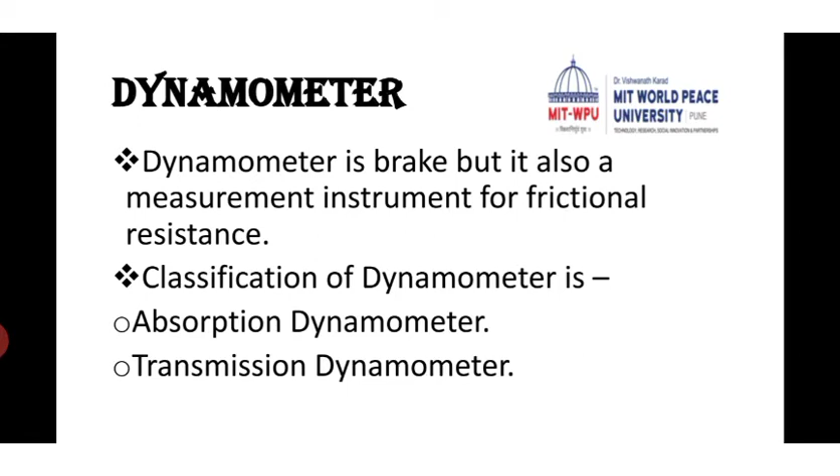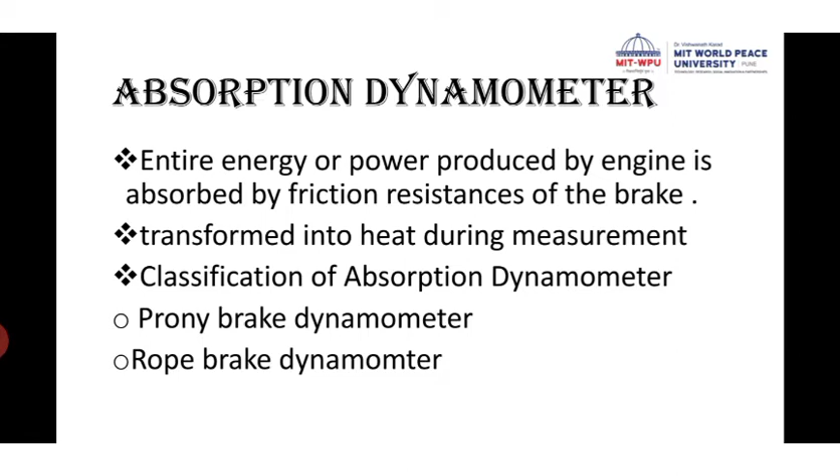In the absorption type of dynamometer, the entire energy or power produced by the engine is absorbed by the frictional resistance of the brake. The classification of absorption type dynamometer includes the Prony brake dynamometer and the rope brake dynamometer.

A helical spring is provided between the nut and the upper block for pressure control. The upper block has a long lever attached to it, carrying weight at the outer end. A counterweight is placed at the other end of the lever to balance the brake when unloaded. Two stops are provided to limit the motion of the lever.

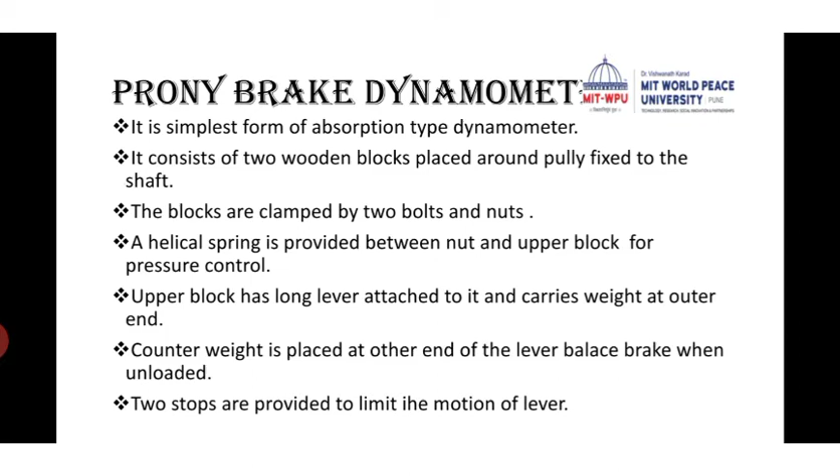The working of the Prony brake dynamometer: when the brake is to be put into operation, the long end of the lever is loaded with weight and the nuts are tightened until the shaft runs at a constant speed. The lever is in the horizontal position. The moment due to weight must balance the moment of frictional resistance between the blocks and the pulley.

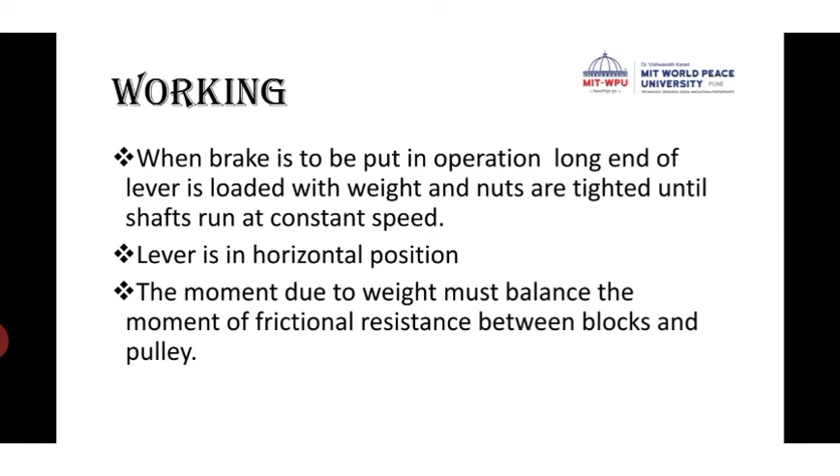For the calculation, W is the weight at the outer end of the lever, and L is the horizontal distance of the weight from the center of the pulley. Then frictional resistance, R is the radius of the pulley, and N is the speed of the shaft. The torque equation of the shaft is the weight at the outer end of the lever into the horizontal distance of the weight from the center of the pulley.

The work done in one revolution equals torque into angle turned in radians, which is T into 2 pi. So the work done in one minute equals T into 2 pi into N. The formula for brake power is work done per minute divided by 60. So the final formula for brake power is W into L into 2 into pi into N upon 60. The unit of brake power is watts.

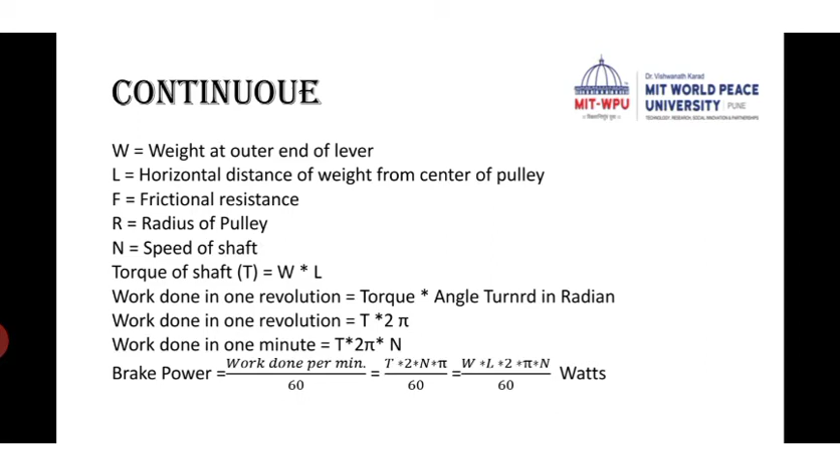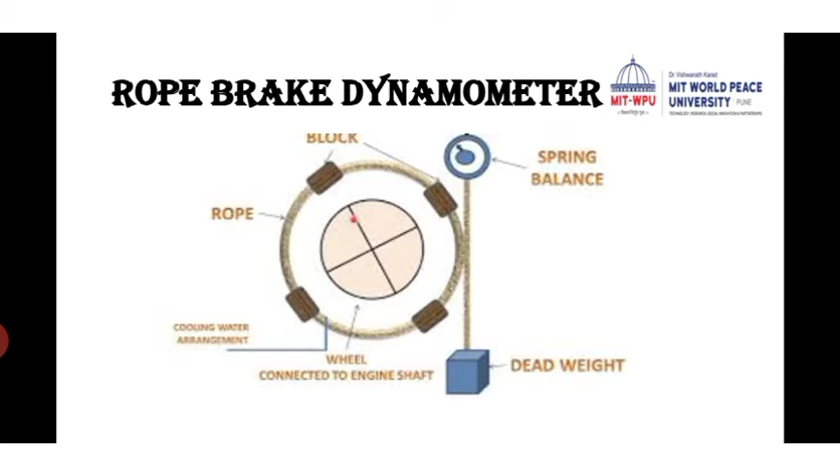The second type of absorption type dynamometer is the rope brake dynamometer, most commonly used for measuring the brake power of an engine. This is its constructional diagram. It consists of one, two, or more ropes wound around the flywheel or rim of the pulley fixed to the shaft of the engine.

The upper end of the rope is attached to the spring balance, and the lower end is kept in position by applying dead weight. To prevent slipping of the rope over the flywheel, wooden blocks are placed at intervals around the circumference of the flywheel.

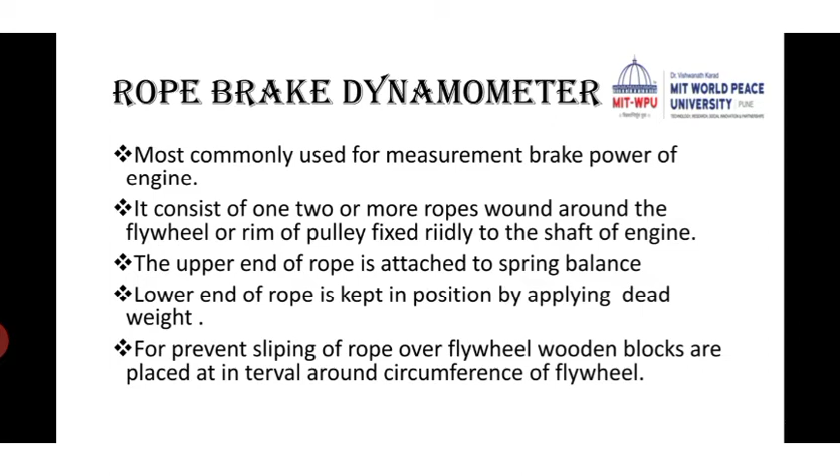For the rope brake dynamometer calculation, the net load on the brake equals the dead load minus the spring balance reading. The distance moved in one revolution equals pi into capital D plus small d, where capital D is the diameter of the wheel and small d is the diameter of the rope.

The work done per revolution equals the net load on the brake into pi into the bracket capital D plus small d. The work done per minute equals the net load on the brake into the distance moved in one revolution into N.

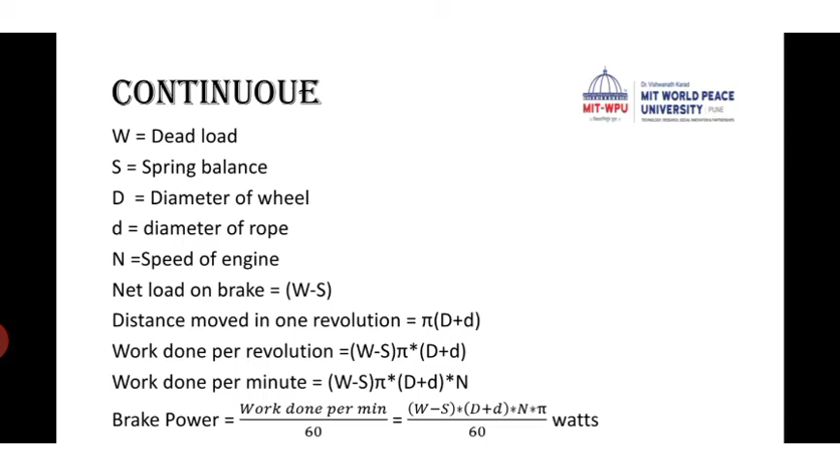The formula for brake power is work done per minute divided by 60. So the final formula is W minus S into capital D plus small d into N into pi upon 60, and the unit of brake power is watts.

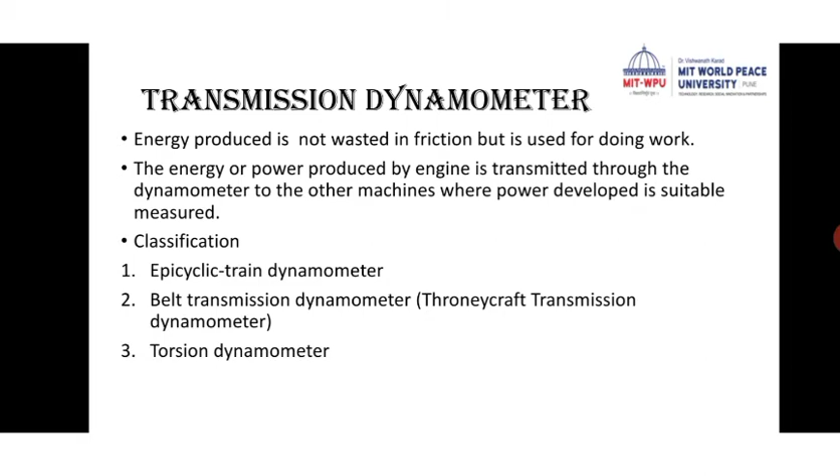Unlike absorption dynamometer, in transmission dynamometer, the energy produced is not wasted in friction but transmitted to do useful work. Energy or power produced by the engine is transmitted through the dynamometer to other machines where the power developed is suitably measured. There are three types of transmission dynamometer: epicyclic train dynamometer, belt transmission dynamometer, and torsion dynamometer.

First is epicyclic train dynamometer. We can see in the figure the constructional details of epicyclic train dynamometer, where it consists of driven annular gear, intermediate gear, wheel gear, and a lever where counterweight and weight W is attached to it, and two stops are there for controlling the speed.

In epicyclic train dynamometer, spur gear is keyed to the engine shaft and rotates in the anticlockwise direction. Annular gear is also keyed to the driving shaft and rotates in clockwise direction. A weight W is placed at the smaller end of the lever to keep it in position. The pinion or intermediate gear meshes with both the spur and annular gears. The pinion revolves freely on a lever which is pivoted to the common axis of the driving and driven shafts.

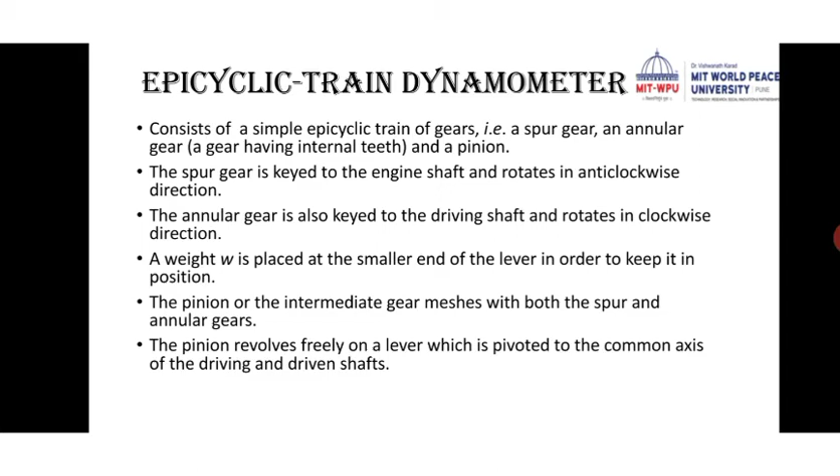For working, let us move to the next slide of the diagram of epicyclic gear train. Here on the right side we can see that pinion meshes with the spur gear as well as the annular gear. When it meshes with the spur gear, it exerts force on it in the upward direction, which is P, and the annular gear also exerts tangential force on it, which is also in the upward direction. So total force in the upward direction is 2P.

To balance that, a weight is attached on the right side of the lever, which is W, and two stops are there for controlling the speed.

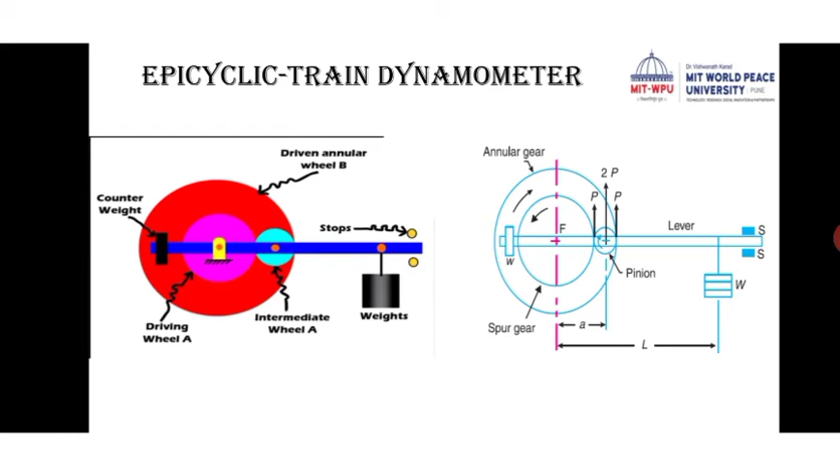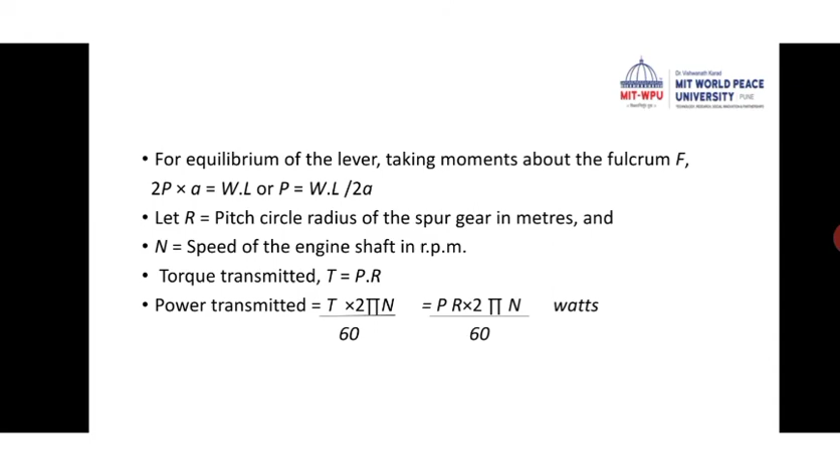Calculations for power transmitted. The formula for transmitted power is given by P into R into 2 pi N by 60, where P can be calculated by taking moments about fulcrum F. So 2P into A equals W into L, or P equals W into L upon 2A, where L is the length between the weight and the center of the spur gear, A is the central distance between pinion and spur gear, and R is the pitch circle radius of the spur gear in meters, and N is the speed of the engine shaft. So power transmitted is P into R into 2 pi N by 60 watts.

So the second type of transmission dynamometer is belt transmission dynamometer. We can see in the figure on the left side the driven pulley, driving pulley, and intermediate pulleys connected to the driven and driving pulleys, and there is one lever with weight W and a balancing mass attached to it, and two stops are provided for braking.

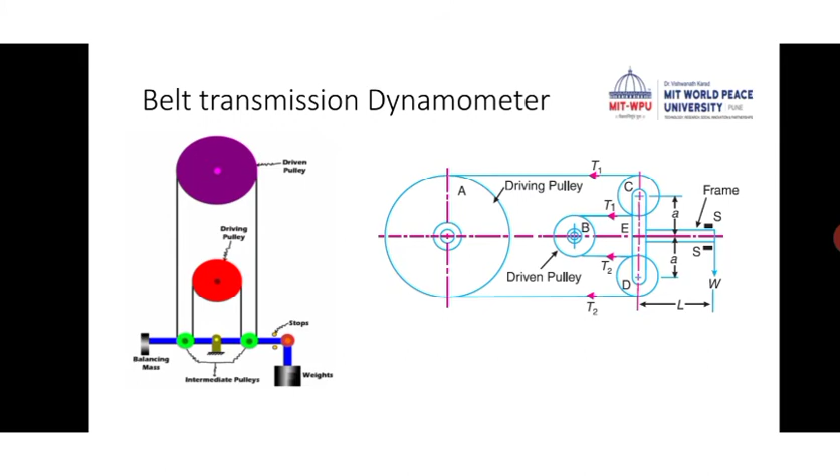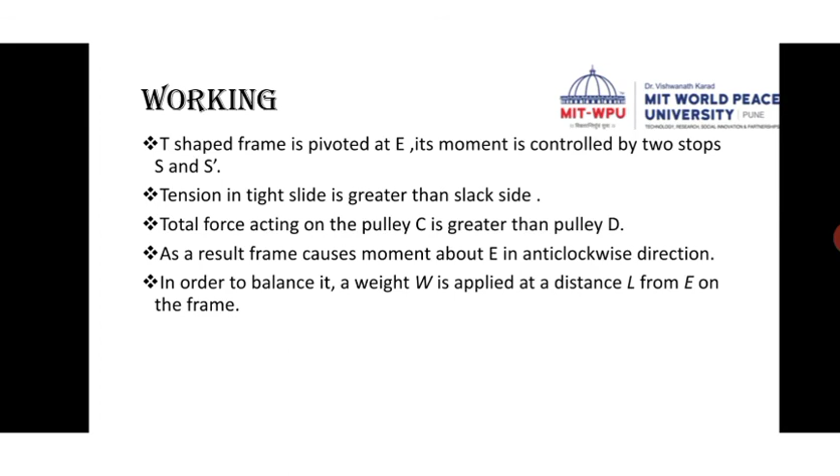So working of belt transmission dynamometer: the T-shaped frame is pivoted at E. Its moment is controlled by two stops S and S dash. Tension in the tight side is greater than the slack side, so the force acting on pulley C is greater than on pulley D. As a result, the frame causes moment about E in the anticlockwise direction. In order to balance that moment, weight W is applied at a distance L from E on the frame.

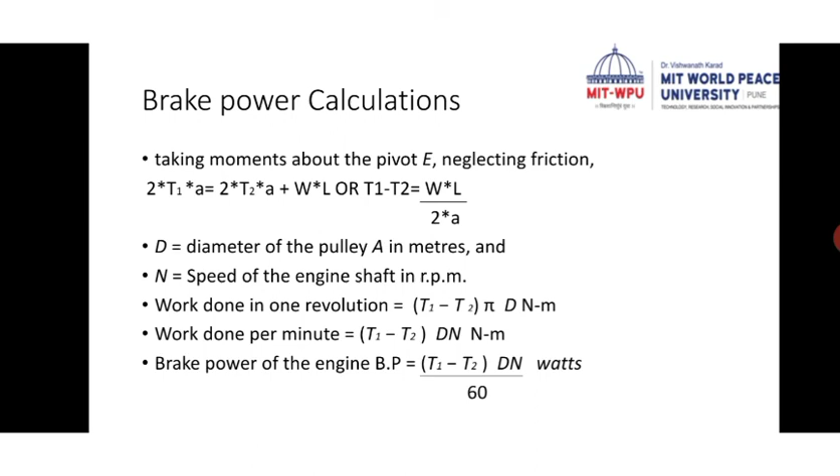So for brake power calculations, first we have to calculate T1 minus T2, which is W into L upon 2A. D is the diameter of the pulley A in meters, N is the speed of the engine shaft. So brake power is T1 minus T2 into D into N upon 60, where T1 minus T2 into D into N is work done per minute, and N is the speed of the engine shaft.

So the last type of transmission dynamometer is torsion dynamometer, which is used for measuring large powers, particularly the power transmitted along the propeller shaft of a turbine or motor vessel of large applications.

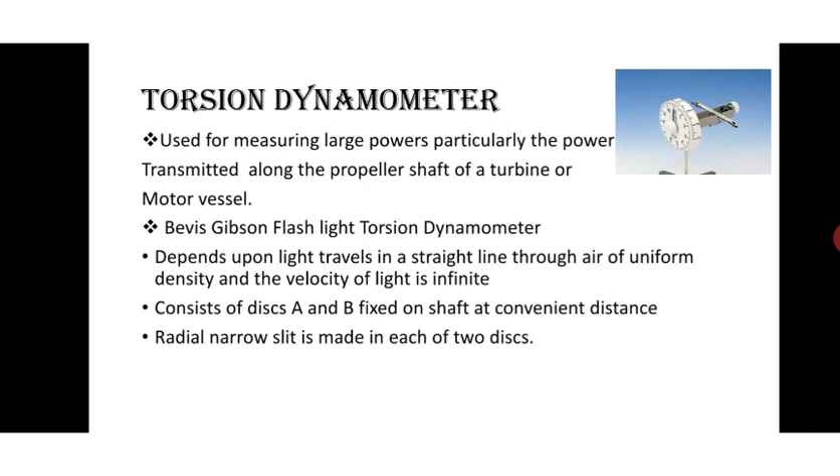Bevis Gibson flashlight torsion dynamometer is one type of torsion dynamometer, which depends on the principle that light travels in a straight line through air of uniform density, and the velocity of light is infinite. As we can see in the figures, there are different stages of working of the Bevis Gibson flashlight dynamometer.

This dynamometer consists of disc A and disc B attached by a rotating shaft. A powerful electrical lamp is fixed behind disc A and an eyepiece is fixed on the right side of disc B. When torque is transmitted, the shaft twists and the slot in disc B changes its position. Due to that, light does not reach the eyepiece E, as you can see in figure C.

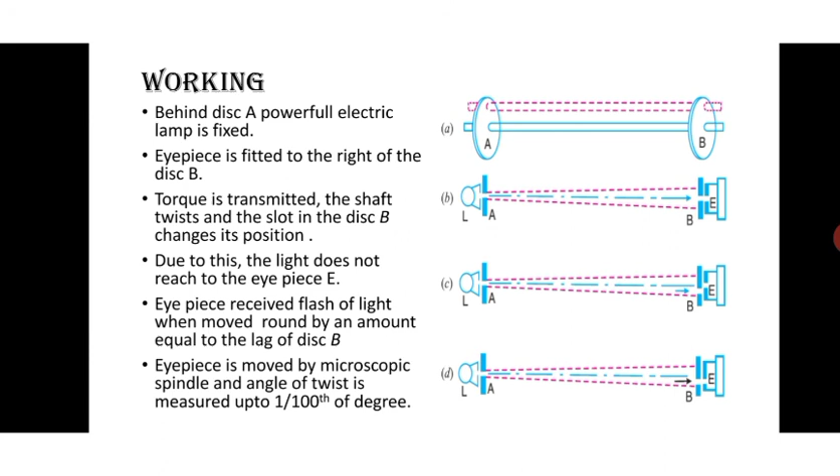So the eyepiece receives flash of light when moved round by an amount equal to the lag of disc B, as we can see in figure D. The eyepiece is moved by a microscopic spindle and the angle of twist is measured up to 1/100th of a degree. Thank you.